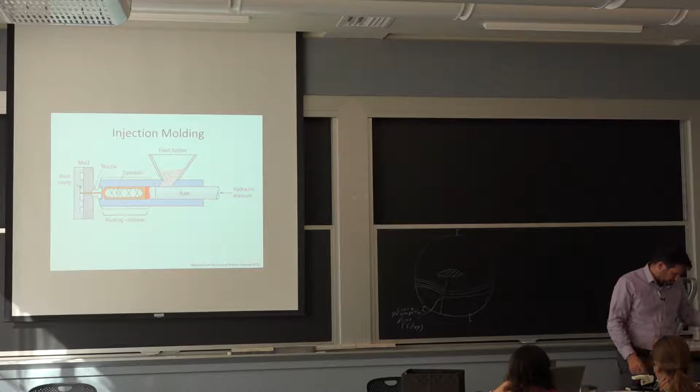In terms of forming plastic, injection molding is a very, very common technique. And the reason is the same way we talked about making aluminum casting being not expensive because of temperature. If you think of plastic, it's even cooler. So you can make all the molds out of metals. You have a very simple cooling system with water or just a circulating fluid. And you can make parts at a very fast rate.

So it's a little bit like a die caster here that we have, but instead we are feeding in typically pellets. So the polymer is made in this huge factory, and they don't make parts. They will make essentially the real compound to be used, and they make it in small pieces, looks a little bit like dog food. And then all you need to do when it comes to making the parts is heat it enough so it's fused, and inject it into the mold. You can make very complex geometries.

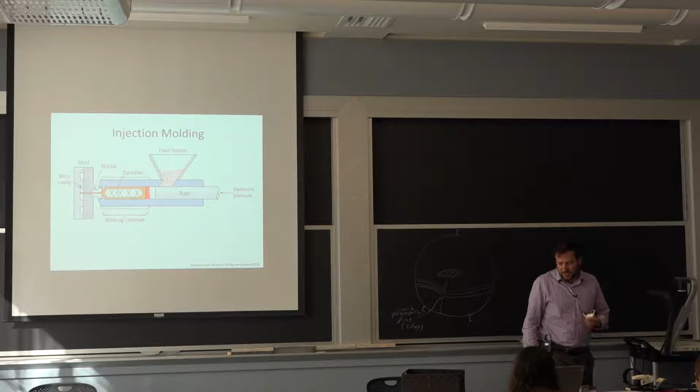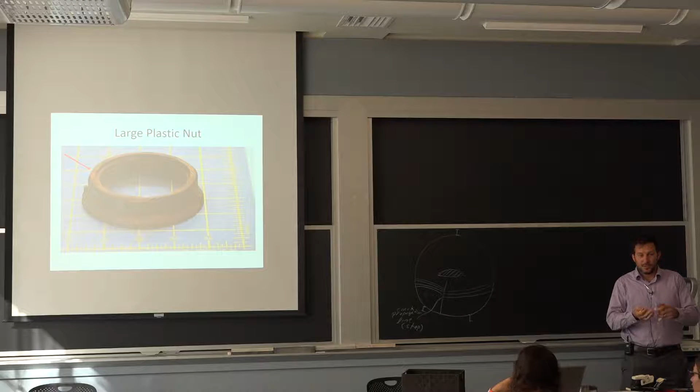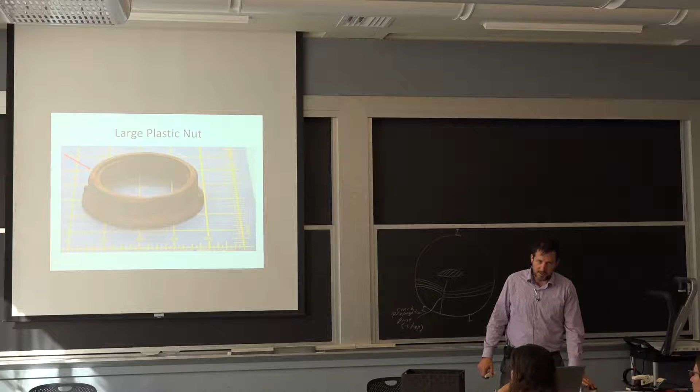One thing to keep in mind is how you deal with the ports. And the funny thing when you look at plastic forming, by far, injection molding is the most studied for two reasons, right? It's the least expensive, but it also leads you to the most number of possible issues. This image didn't come out very well, but it's essentially a thread and nut that was used on a big exhaust system. It probably should not have been plastic, but somebody thought it was a great idea because it was corrosion resistant.

So it was a composite, injection molded, and you can see this little tab. This tab had no reason to exist other than for the molding process. It essentially got damaged on this end here, probably during service; there's no reason why they would cut that part out in the factory, and that's really where the crack started. So from analysis of this, we've looked into it, the image is not really good. Next time I present this, I'll bring the part.

But you can see that essentially the resin is flowing from this point. So this is not really what we call the mold line between injection points. This is at the injection point. And the only reason why you could initiate here is, first of all, you're in the bigger diameter, so as you torque it up, you get more stresses there, because that nut's going to grow in diameter, so you get more growth on the outside.

But also, the second you break that tab, all your molecular orientation and the skin we talked about last time, you lose it. So you lose the skin, and when you think about how it was injected, it was starting to flow this way, flow this way, flow this way. So right over here, you can think that the macromolecules are actually oriented in this direction, and when you torque the nut, it's pulled the other way. So if you put all that together, here you go, you had a crack.

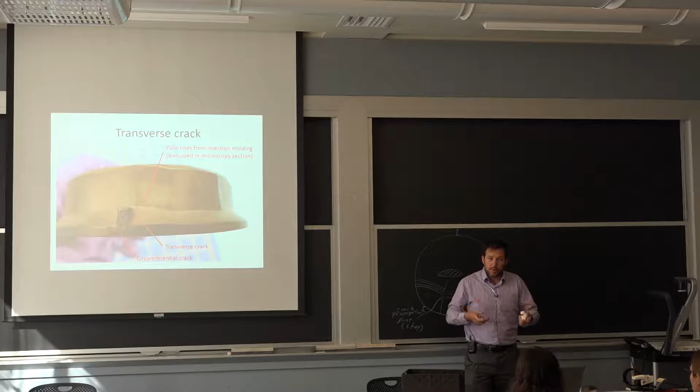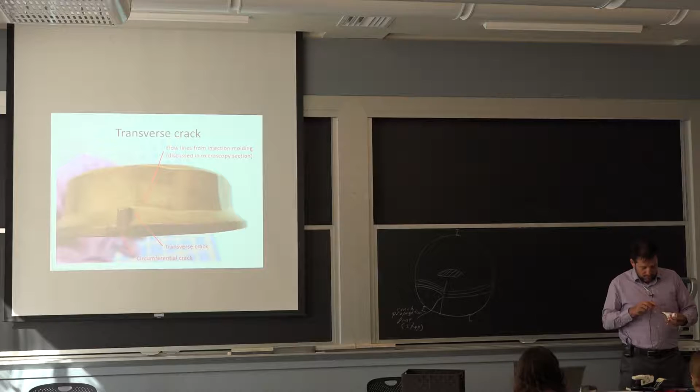So I think it gives you a little bit of an emphasis for the long term. I mean, this nut essentially failed after 5 years. Nobody touched it, apparently anyway. And it essentially is a sort of creep process that happened, so you don't see it right away, and it's associated with just very, very small changes on the surface. So it's a little unfortunate, like a lot of other parts, and they make a lot of effort in the injection molding process to try to avoid all these mold lines, of course, but it's very difficult.

Extrusion now, and I brought a section of pipe, doesn't have as many issues, so you make the equivalent of wrought product here. You don't need to go through deformation processing. Typically, you heat up your pellets the same way that you'll do in injection molding. It goes through the die, and there you go. You have a pipe, or you have any shape you want. You have a sheet. Pipes are very common.

Now, one thing that I do want you to keep in mind is the practicality forces us to do an extrusion here. But the extrusion means that all our material is preferentially oriented in the direction of the pipe. Now, the hoop stress is actually higher in the other direction, transverse to it, and there's nothing to do about it. Unless that may be an idea for your project. If you want to make a pipe that's much better, then you want to have the molecular orientation around it, because your hoop stress is twice the longitudinal stress.

So having said all that, when we qualify pipes, we do need to test them in the transverse direction because those are the properties that are relevant. So we can either take a sample and mount it in a very special way so the grips are like half a circle on each side, half a cylinder, and we pull on it. It's got a little bending. It's not perfect, but it's the best we can do. Or you pressurize it. And that's when we were talking about the 10,000 hour test.

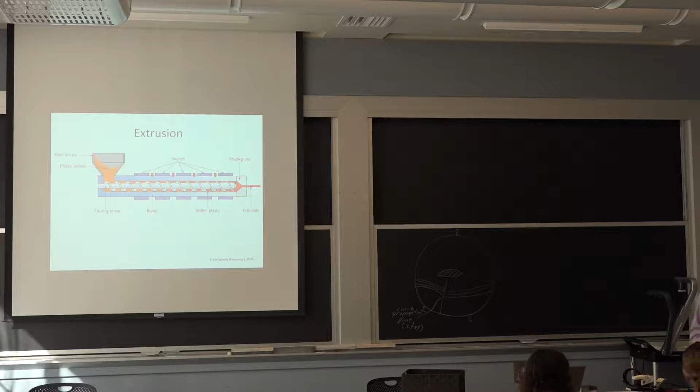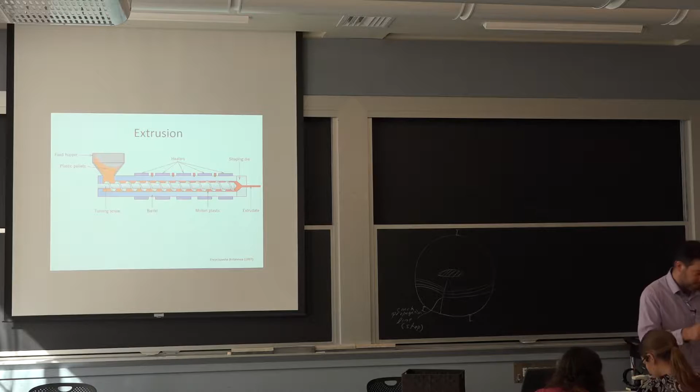So you see the stress cracks on the lower half. They almost go all the way through the thickness, and this is just a saw cut on the other side. You can pass it around. And I'll show you on the microscope right now what it looks like. I'm a little bit out of it.

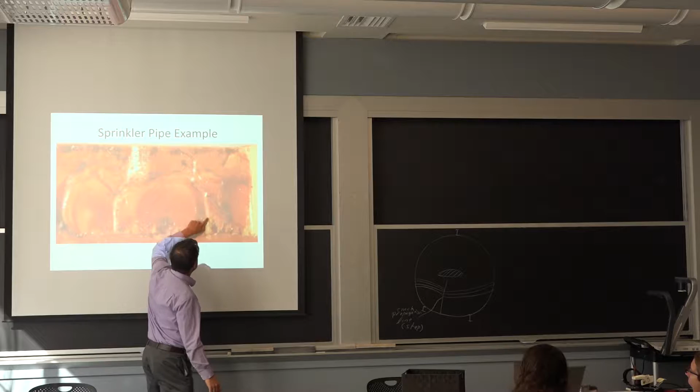So this is the inside of the wall, and the outside is on top. You can see these small cracks. And in the context of what we looked at the beginning of the class, this is a crack arrest line. So at a certain point in time, we had a crack this big. We have our crack propagation line right here, because we had another initiation here.

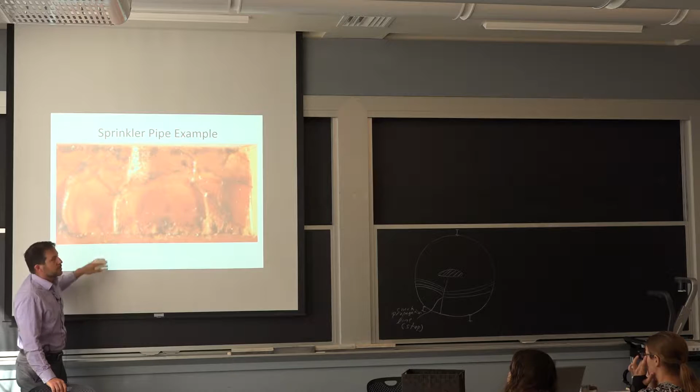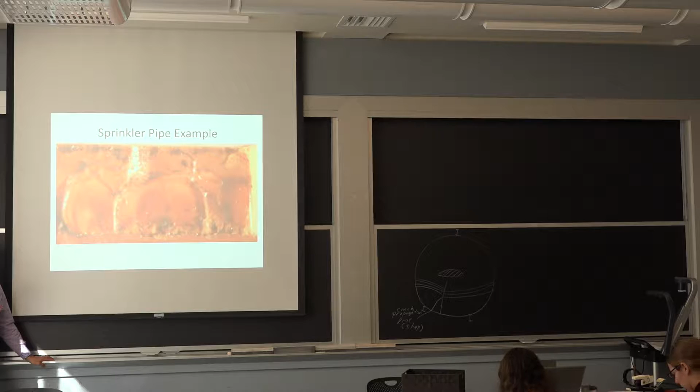So on that fracture, what you'll see is a lot of individual initiations that are spaced maybe 3 millimeters away from each other, approximately. So what does that tell us? Tells us that the problem is not one inclusion, right? If we had one inclusion, we have one crack and it will just grow and cover the space. So initiating was very easy, and most of the time was spent in actually growing that crack through the wall.

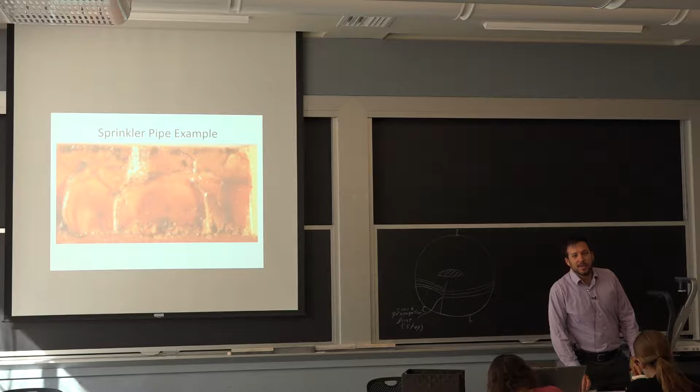It's something that comes up over and over again in failure analysis. When I have one initiation site, yeah, there's probably something very special there. But when cracks are initiating everywhere, it's either there's too much stress, or in this case, that the environment is contributing to the initiation of the failure.

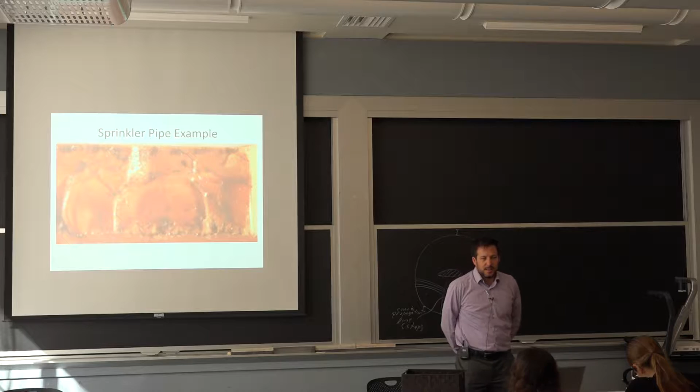So what do we do about it? Again, you can ask the plumber not to use any lubricant. There's nothing wrong with asking, or at the very least, make your material as resistant as you can to contaminants that you can anticipate in plumbing. So it's been a big adventure.

The companies that sold all this system, of course, didn't know all the problems they were going to have. And then when you start having trouble, sometimes it takes a little bit of time to realize, well, okay, it happened to this person. Maybe they really put some strong chemicals in the pipe, and then you start having 10 calls and realize, oh, we have a problem. So now you start making changes, but it takes a lot of development.

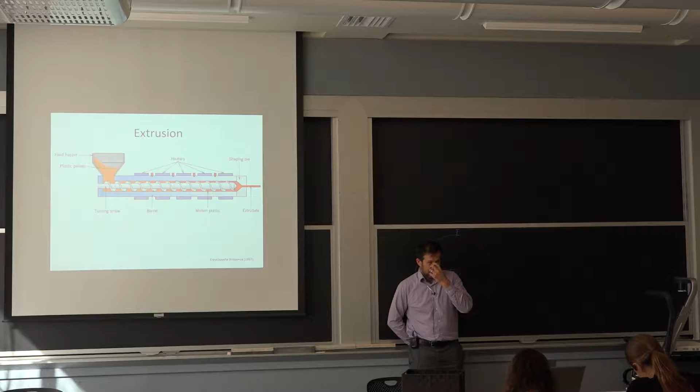I mean, these tests at 10,000 hours to know if you started initiating cracks with one compound and then you do it with another compound, and what else can be in there, even from the water treatment. So I think, if nothing else, it'll point to you that a big change in material in an industry can sometimes work perfectly. It only has benefits, but in this industry with the fire sprinkler, they had a lot of trouble.

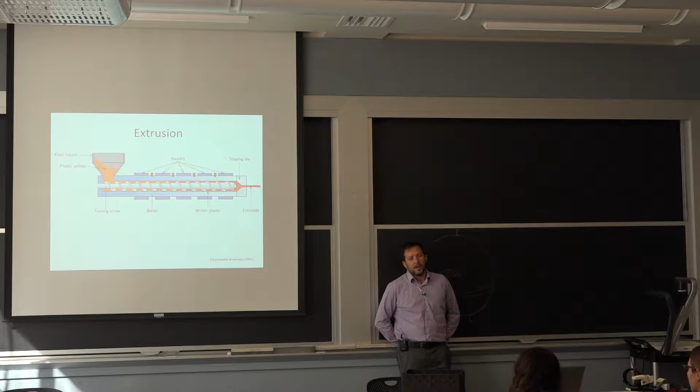And now a lot of it turned out to be a problem for the insurance companies, because this is flood damage to a building. So to some extent, if the mechanical engineer who designed the system just went with what people have been using for a couple years, things been going well, they could not know. But you look at it 5 years down the road and say, well, this was not a product ready for service yet. They could have done more smaller scale testing to figure out that they were going to have a big problem.

The main advantage of all these processes is you start the machine, and your first maybe 10 or 100 feet are not really top quality. It takes time, and you have waste at the beginning. But when you reach a constant condition, you're controlling very well your flow, your temperature, so you keep making it. You don't stop the machine anymore. So it's used in continuous form.

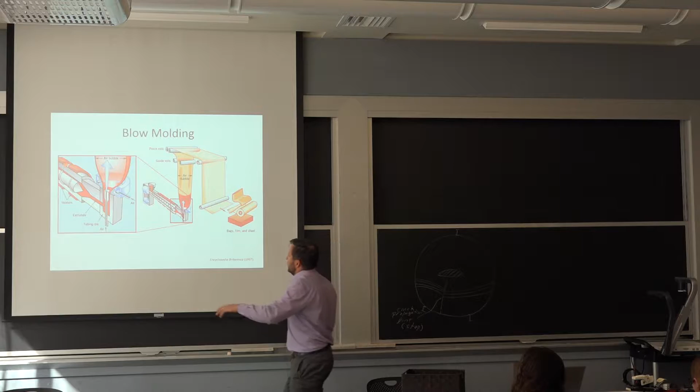It's used for these plastic bags, but you will also use it for bottles. It's a little bit more intermittent. If you're doing a bottle, it's a step-by-step operation. So you need all of this here to essentially be insulated, so when you stop the flow, your temperature profile doesn't change. But it is done.

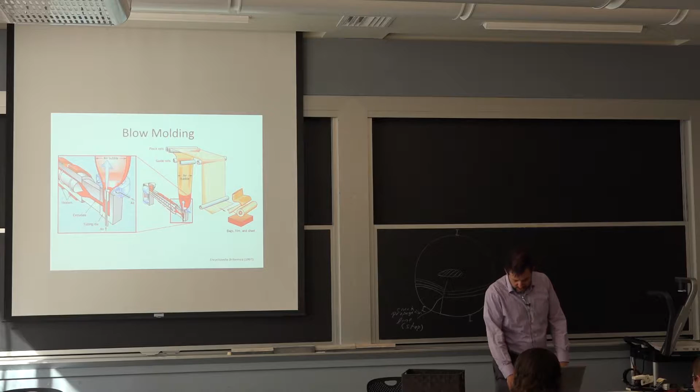Perhaps the last very common technique is compression molding and resin transfer. Resin transfer is very useful with composites. So if you essentially use a mat or a reinforcement that is reducing the ability to inject the resin into it, it's a lot easier to lay your reinforcement, put a sufficient amount of resin and just really press into it. So that's done a fair amount.

It's a more expensive process because in terms of speed, you have to lay everything down, then you close the mold, and you have to let it cool before you put the next one. And it's not a problem that we have with all the other processes that we looked at. Very much slower.

Now, somebody last class asked me about references, and for plastics, I've ended up using 3 or 4 different ones. And I think the reason is I didn't want to just cover injection molding, because there are a lot of really good books on injection molding, but if you want to be more general, it's very difficult.

So I injection mold this, and this one is just a spring for my binding. It's the old generation from the 90s. So you got the spring here. Which end does it fit in? Not this one. Anyway, so the idea is there's a component here that's always loaded because there's a spring for the rotation capability. And maybe 5, maybe 8 years ago now, the whole thing came off.

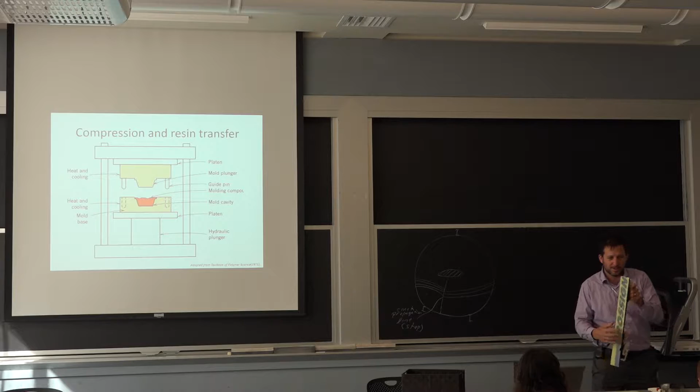It was very cold weather, just getting off the chairlift. And it got me thinking. And I found what the problem was just by looking at it. There was a thread there. So you can see that yellow zone? It's from the root of a thread because this zone is all tilted all the way to the corner. So this crack was there for a long period of time.

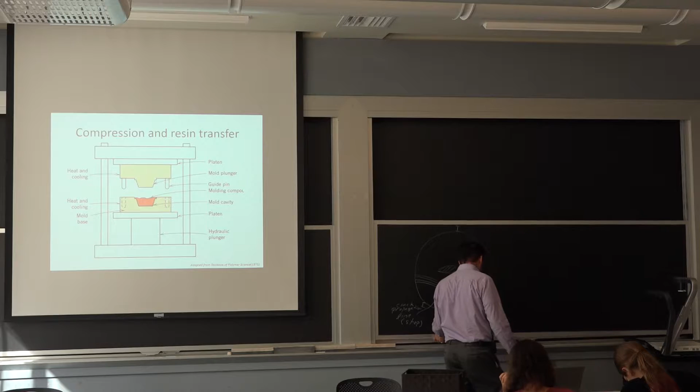Now, 20 years, really? So the truth is, and that's something that I do want you to keep in mind with all these plastic components, is they do get UV degradation and also oxidation in service. It's one of the biggest problems with polyethylene. So if I make a polyethylene component, what I need to do is put in what they call an antioxidant package.

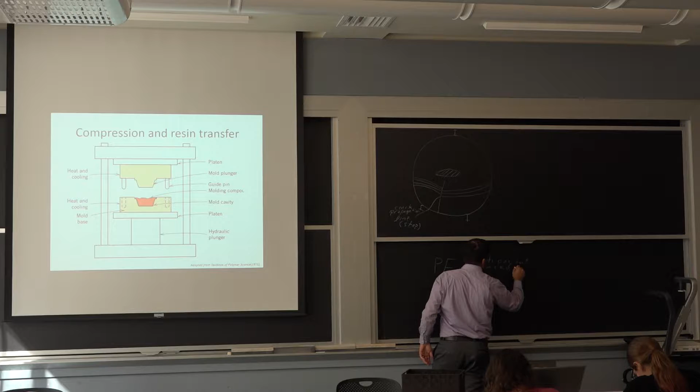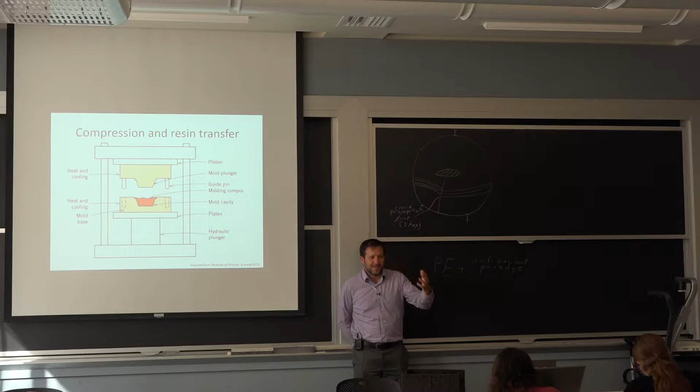And a lot of these are proprietary, and there's some reasons for that. Somehow it's not considered mainstream engineering. It's kind of, if you want it to last for a long time, you do these things, and then the companies started to each have their own way of doing it, and it never got really standardized.

It is tested, so if you buy a resin, you can essentially subject it to a temperature ramp, a few degrees per second, and you say, I want it not to start losing weight until 200 degrees C or whatever your criteria is. And that's how you know if the resin from vendor A is better than the resin from vendor B.

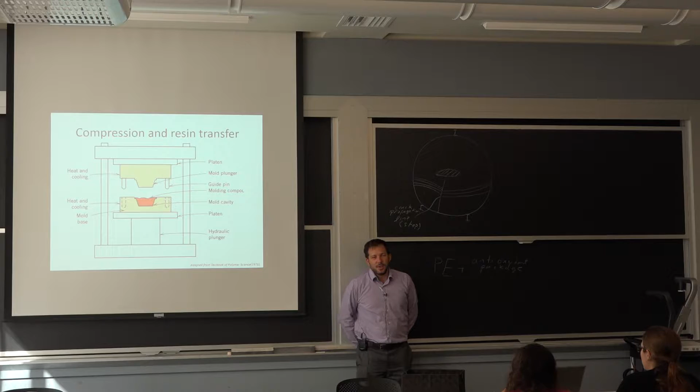Now, the reason I'm mentioning it is there's no way I could have abused this the first 5 years of its life. Nothing ever happened because it was fully intact in all the large molecular structure. When I start losing the antioxidant package, now I start breaking these big chains. So my molecular weight is going down. It's probably going down even more in the regions where we have stresses. It becomes a time and stress-induced degradation.

And the way they describe it a lot is it's like wine. Wine gets better, gets better, gets better, and then eventually it turns to vinegar. So if you run out of antioxidant, it's very dramatic. From one day to the other, yes?

Is this an additive that you put in the polymer? Yes. So it's not a coating? It's added to it. It's very small, and I know a bit about it, I had to do research with it, but what I can tell you is they're not very long molecules, and they'll travel and essentially attach to any broken chain. And that's how you prevent further degradation.

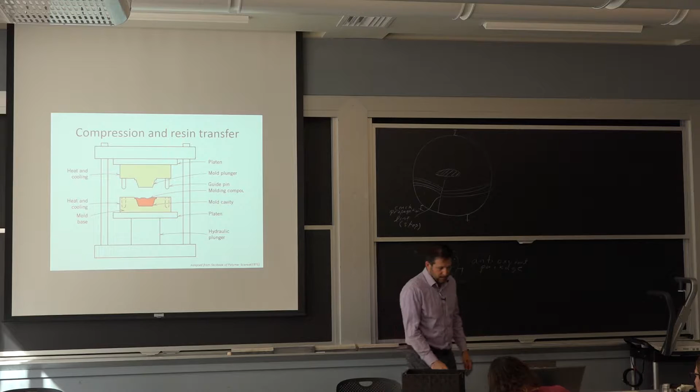Maybe the best example of that is these flexible pipes. So nothing happens unless you reach that critical point in time, and then it is a function of how much package you've put in the first place. So it's just the same way that, I think I mentioned at the beginning, you'll specify a certain welding process. Well, if you don't say exactly what you want for your long-term chemical resistance of polyethylene,

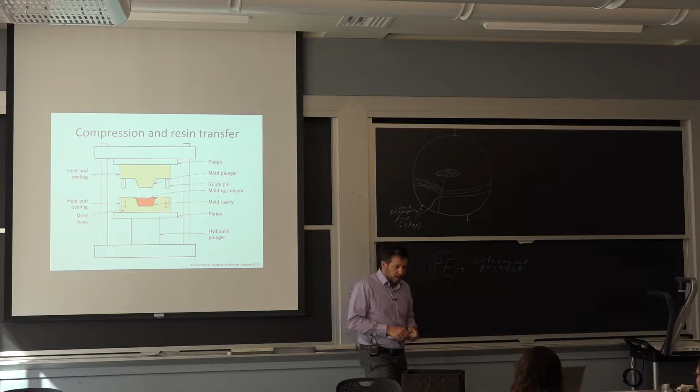you have a problem. The PVC, so the orange one over there, doesn't need an antioxidant package. It needs other additives to prevent stress cracking, but it's not susceptible to this oxidation in the environment. So before I go to this polymer, I want to bring in this one. Just another example. What I was trying to do today is give you different cases of analyzing failure that give completely different outcomes in terms of what to do. This one relates to this antioxidant package.

So it's flexible plumbing. When we say flexible, there's a limit, but you can essentially put that into your home without having joints when you go from the floor to the back wall all the way to the appliances. The way we put these together, this is the most common plumbing system right now, is you do have some fittings. You need to make connections. The polyethylene is so flexible that we have an expansion tool. So we just grow the inside diameter, insert the fitting, and the viscoelasticity contracts everything back in place. And there you go. You got a plumbing joint.

This is one that was taken apart here to make sure it's strong. When you expand, you also put that little ring that reinforces it. So you start like this, you expand with the ring on, put the little plug here, and here's your joint. That's it. It takes about 10 seconds to do. And there's no real way to mess it up. When we talk about welding and soldering and putting the flux and all the other things, with this one, as long as you put the pieces all the way in, it will be a proper installation. You do have to cut the pipe straight, but they have tools for that.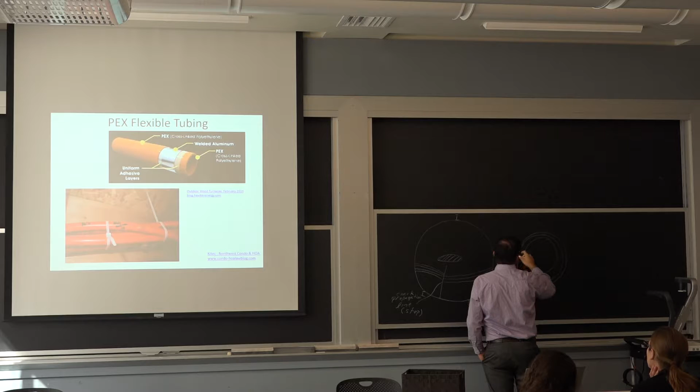And these are still out there. They're pretty useful. So you have a little inner layer of polyethylene. That makes sure that you don't contaminate your water. And essentially you're using the same environment as the other PEX pipes that are very common. Then you put a little layer of aluminum. Now the layer of aluminum here had a very specific purpose. From the way it was designed, the idea was to prevent oxygen from entering the system. Their intent, the people who developed this, was I will use this when I have radiant heat.

So in a home, you put it under the floor everywhere, and then when you turn it on, it goes to the hot water heater and essentially heats the floor constantly. The only way that a good hot water heater works is if it's a closed loop system and there's no oxygen coming back. Otherwise, you corrode it very quickly.

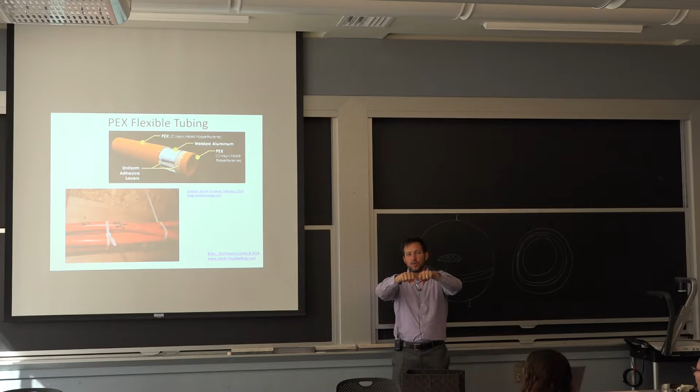So there was this purpose of the aluminum, but then the plumber said, hey, this pipe, I like it much better. First of all, if you have the aluminum core, if you bend it, it stays bent because the aluminum keeps the shape. So there's been this growth in the use of the product for potable water. The problem with potable water is now they had essentially oxygenated water going through it.

And instead of having the resin last for the original intent of 20 years, it lasted a couple years and then started making these big blisters everywhere and leaks. The problem always with plumbing is it's inside the wall, so nobody is happy because then you have to tear down a lot of walls to repair.

The only problem was the people that were making this didn't realize that it was also going to be used in a high oxygenated water environment. So they didn't change their antioxidant package. They used the cheaper antioxidant package. There's a cost associated with that antioxidant package, but by the time they fix it, it's still used. But this is exactly like the CPVC system. It's down the road that they were able to avoid the problem.

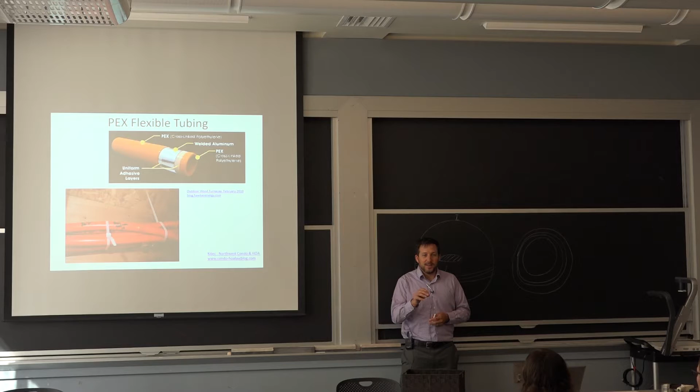Now it turns out that when you start having so much oxidation, the acidity inside the polymer goes way up. It's like you get to pH 3, and at that point, the aluminum corrodes very, very quickly. So it wasn't a barrier to the water. It just got poked into it.

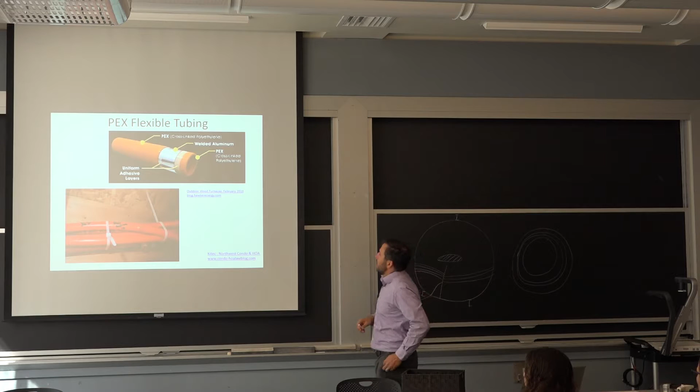So now to tie back into our processing, I do want to just make you imagine a little bit. You think that this is hard to do, but a little bit in the context of what we talked about, if you have an extruder and you feed plastic in the center, you have the aluminum sheet that you bring in, you fold it, and then you put a seam weld, and then you have some extra resin to put on top. This is a one-time operation, all done at once.

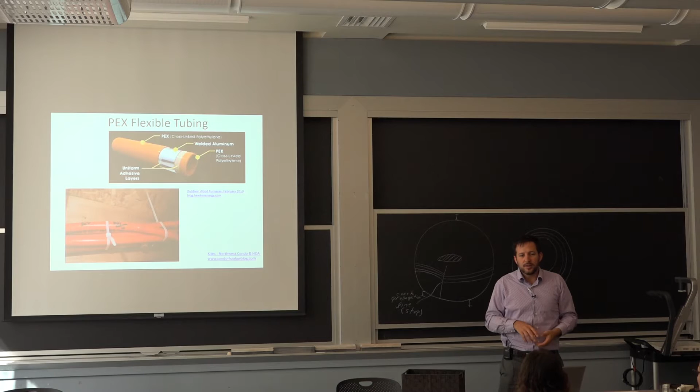It's not perfect. There's a little bit of wall thickness fluctuation depending on your level of control, but it is essentially a very productive way of making these pipes, and they still make them, although the original manufacturer, I think, just went out of business. Somebody else had to take over.

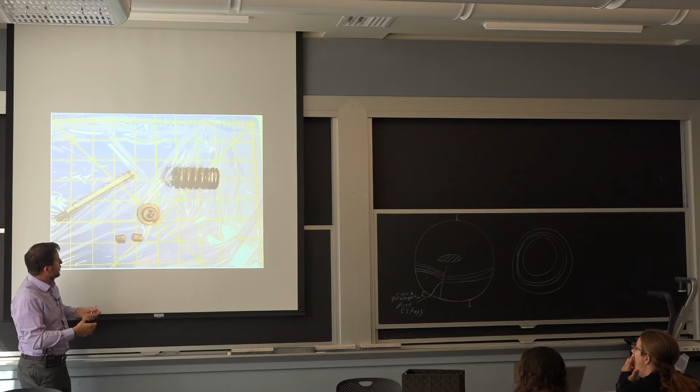Okay, one last example that's completely different, and we're going back to metals for it. It's an intake valve for a big combustion engine. It broke here, so you can see that it's missing, in just an inline Volvo engine. So what happened is this is mechanically attached. The head here is mechanically attached to this rod, the push rod, using a certain form of a compression fitting. And we had the transverse crack right there.

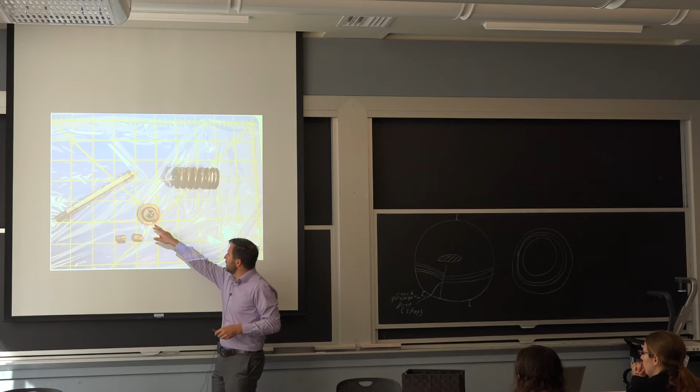It's a rod product, so maybe it's just that there was too much load applied to this piston head, because if you start touching the head of the cylinder in one area, when you close, you can have some bending loads. That's one option. Maybe there was an inclusion from manufacturing, and maybe we don't know. So somebody sends it along. We look at it. This is what it looks like at first.

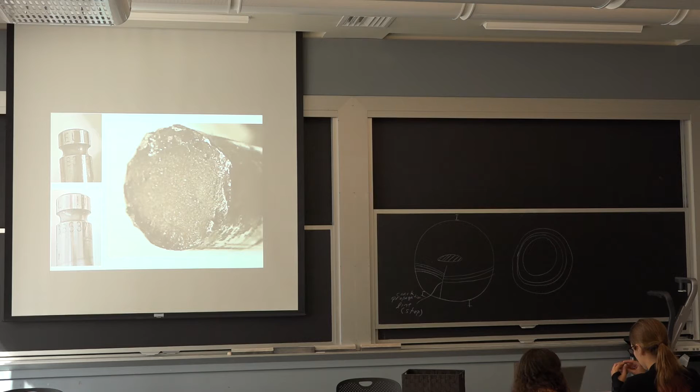The only thing I can tell you from here is I do see the crack arrest line up above there. So I'm already able to tell you there wasn't much load applied to this. I'll circulate it so you see the big arrest line over here. And there are two initiation sites. We'll cover that with the micrographs. That's just a few rotated images showing it's not really a straight crack.

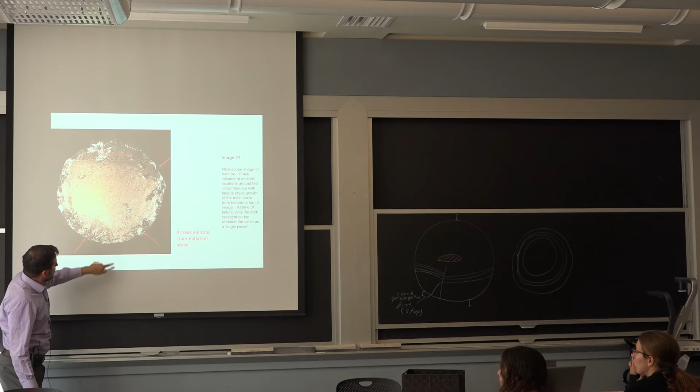All right, so we're looking at the top here. This is the final fracture, and you can see it on the sample. We had one crack here, and we can see the arrest line. And it's not really clear on this image, but I identify another crack here, and we'll see in the detail how relevant that is. So started small.

You know, I'm looking at it here. It's out of focus in the initiation area. So that means there's something missing, right? Was it a notch? What exactly was it? But there's just a big piece, just about 50 micrometers, 100 micrometers, that's missing on the surface. Somehow, though, this image, well, I'm not the one who took it, but when the engineer came with it, I was like, well, I can't really see what happened.

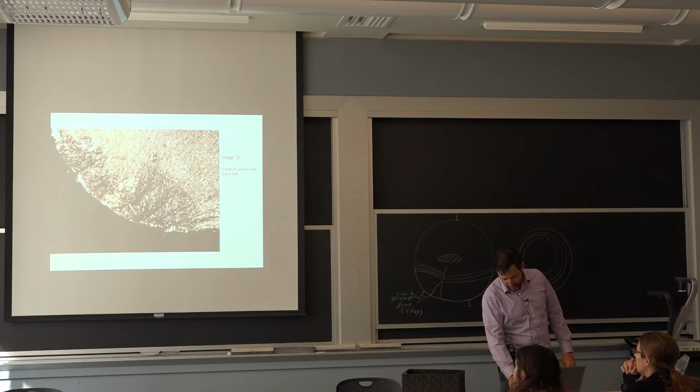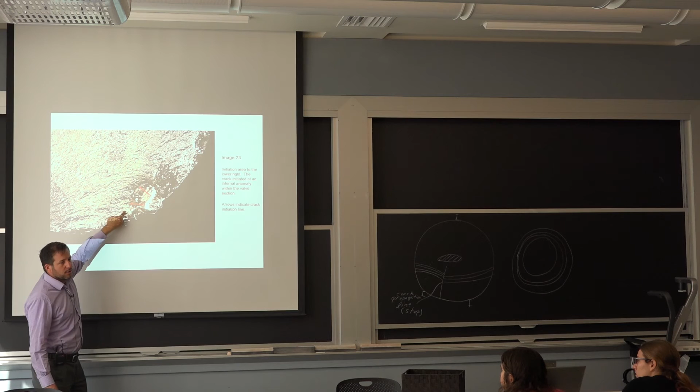Then we look at another one that I thought was a lot more interesting, because we clearly see the end of that void, and from there we start seeing all these small crack propagation lines, a lot of them. So what this specific image allowed me to say conclusively is this hole preceded the formation of a crack. It may look obvious, but it turns out the hole is just a corrosion pit. So it could have gone the other way around, right?

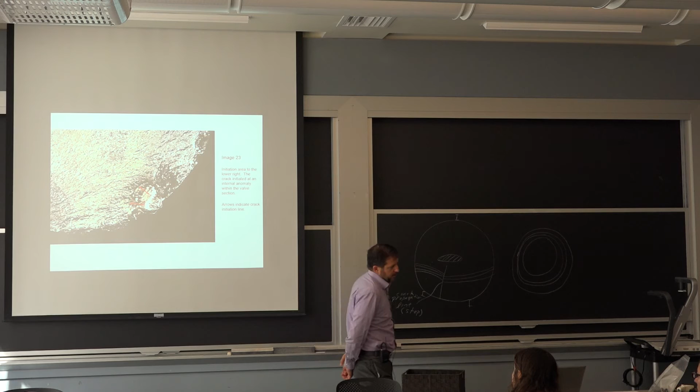You break the engine, and then there's, you know, circulating cooling fluid coming through it, and then you pit the shafts. But in this case, it's very clear that this was already there, and then you started a crack. So the most likely thing that happened is the engine wasn't used very much or well lubricated, or there was one last maintenance that was done before, and then it started corroding, and it corroded and then failed.

Now, are you going to blame the material? No. You know, so you're going down to essentially maintenance as the problem here. So that was significant, yet not super sophisticated. So that's one thing I think you can see. We do learn from experience, right? But sometimes it may take years before you actually get an answer for something. So if people have been using a certain type of process or material for something, it takes a lot of effort to make a transfer, because there's so many things that they, oh yeah, that's fine.

For example, medical device, say we're using stainless steel, we have a special joining process. I can make something better, yeah? Okay, is it going to work in cold temperature? Is it going to work when they clean it with these strong chemicals? And what if the surgeon decides to bend it? Is that going to still work? So every time you make a change, I think is your opportunity to go back to exactly what is needed.

So I would say for engineering, if we never had failures, I don't think we'd be anywhere near as good as we are, because it's not that we couldn't imagine it, it's that we can exactly adjust to it. So my bindings, 15 years, they knew that. That was just planned for, right? Because after 10 years, you're supposed to change it anyway. They changed the design of it. So this one was not an error in terms of the product. It's me abusing it, trying to use it too long.